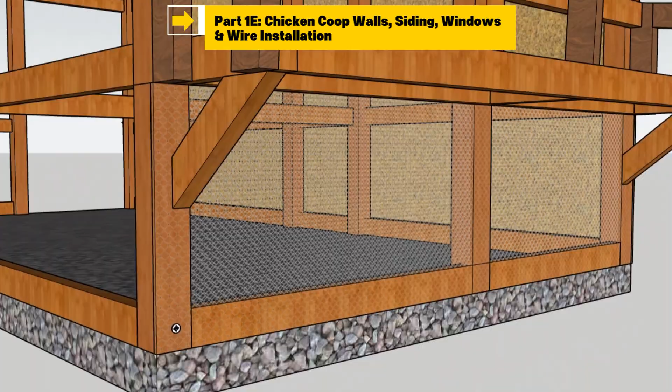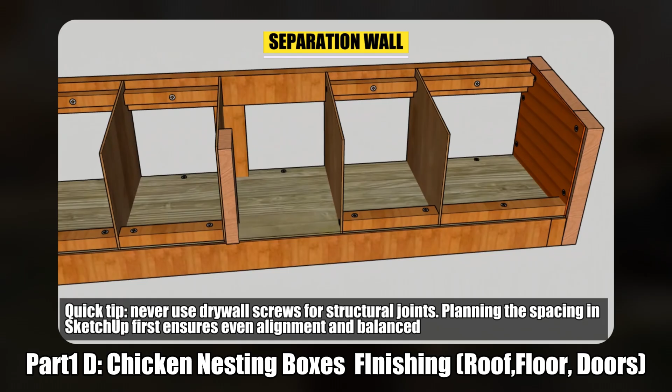Today I'm working on part 1E of my chicken coop design here in SketchUp. Before we start, parts 1A, 1B, 1C, and 1D are already uploaded on my channel. So if you haven't watched them yet, go check them out or click the links in the description below.

In this part, I'll be designing the walls, adding siding, placing the windows, and also modeling the chicken wire for ventilation and protection. And don't forget, I'm giving away my full chicken coop design plan for free.

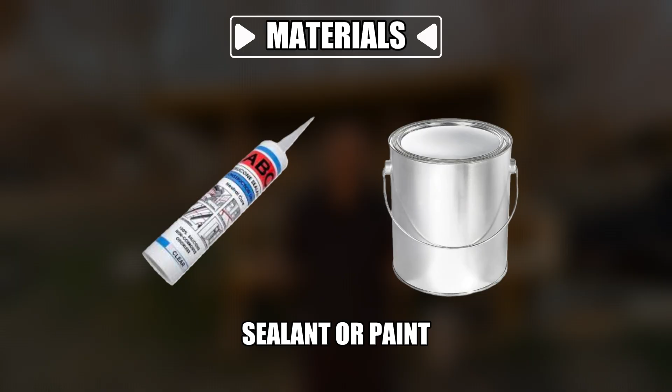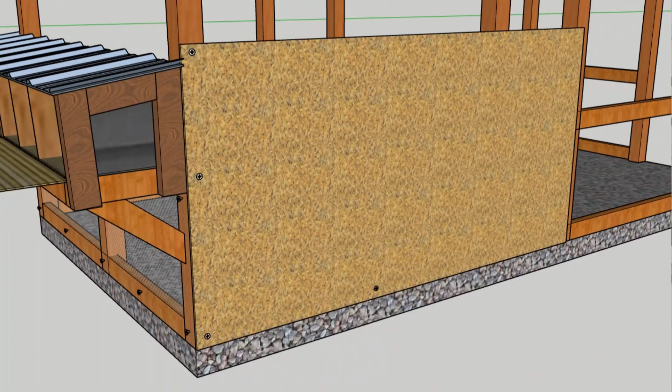Now let's walk through the detailed step-by-step process for the chicken coop walls, siding, and window. Step 1, right side wall panel design. For the right side wall, I will install plywood or wood panels cut into sections to fit the framing. A total of 4 panels will be used to cover the entire wall area. This is based on the standard size of commercially available plywood, which typically comes in 4-foot by 8-foot sheets. Using 4 sheets ensures efficient material use with minimal cutting and waste.

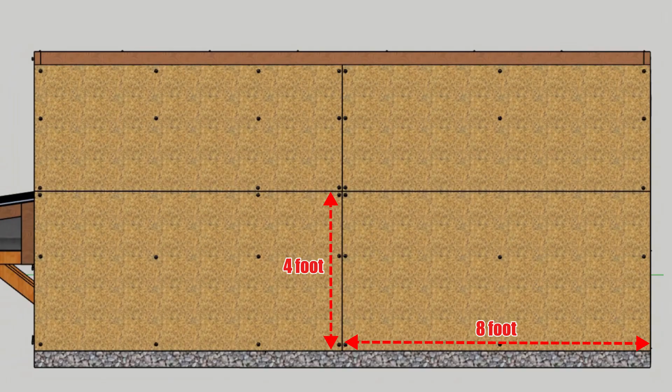The panels will be installed horizontally. The lower portion of the wall will use full 4-foot by 8-foot panels, while the upper portion will be completed using cut sections measuring 3 foot 2 inches by 8 foot, allowing the wall to reach the full height of 7 foot 2 inches across a total width of 16 feet.

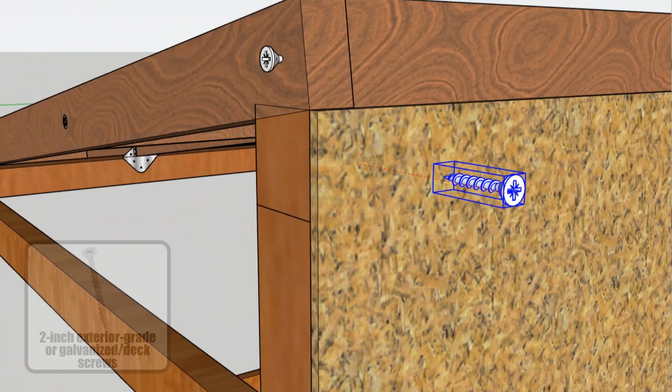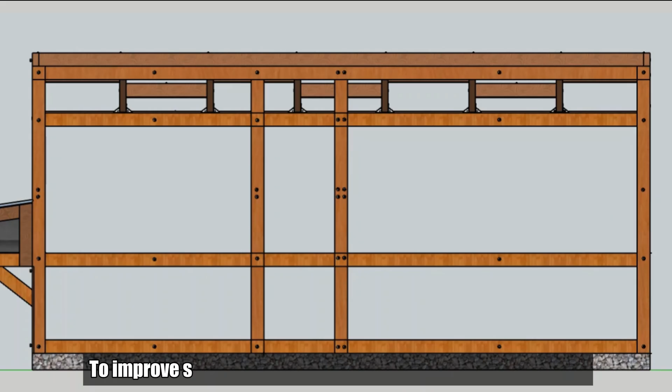To attach the panels to the framing, I will use 2-inch exterior grade or galvanized deck screws to prevent rust and ensure durability in outdoor conditions. Extra attention will be given to the joints and corners between panel sections, where screws will be spaced closer together to improve strength, stability, and overall structural integrity.

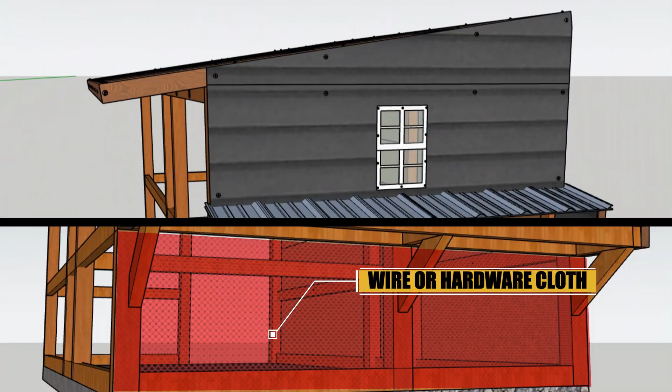Step 2, front wall with window. For the front wall panel, as you can see, the upper section is made of wood, while the lower section uses wire or hardware cloth to allow proper ventilation and airflow inside the coop. The wood panel dimensions are 2 feet 6.5 inches, 8 feet, and 3 feet 8 and 15/16 inches, while the wire or hardware cloth measures 2 feet 2 inches by 8 feet.

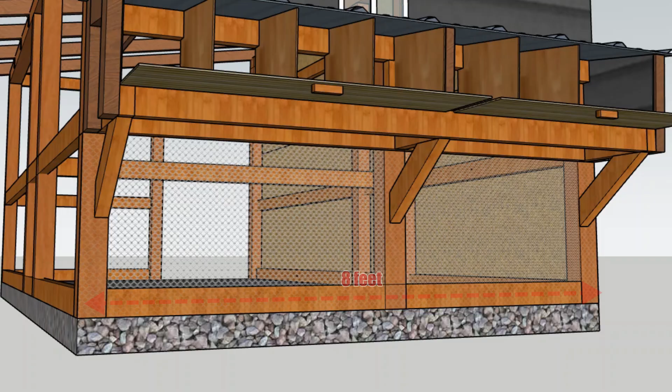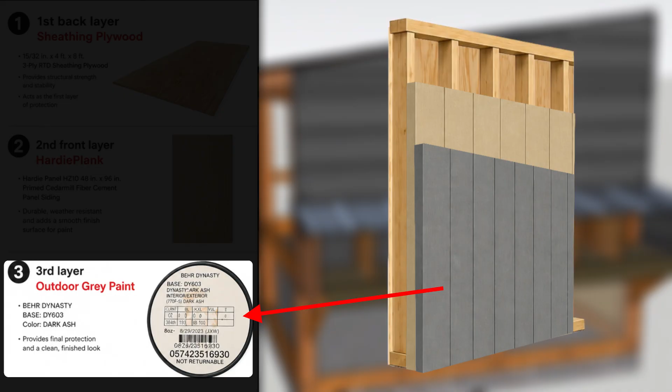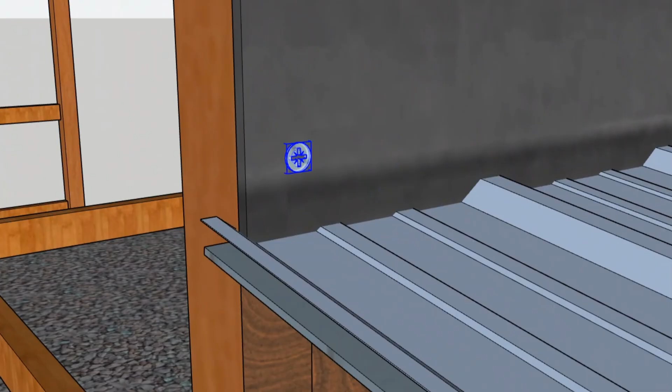This wall assembly consists of multiple layers. Starting from the interior, plywood sheathing is installed. On the exterior, HardiePlank is applied and finished with paint. To attach the wood panel to the frame, I use 2-inch exterior grade or galvanized screws for durability. For the wire or hardware cloth, I secure it to the framing using either staples or screws for a firm, reliable hold.

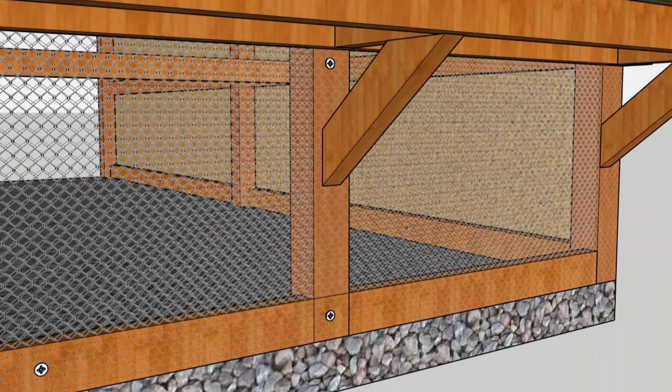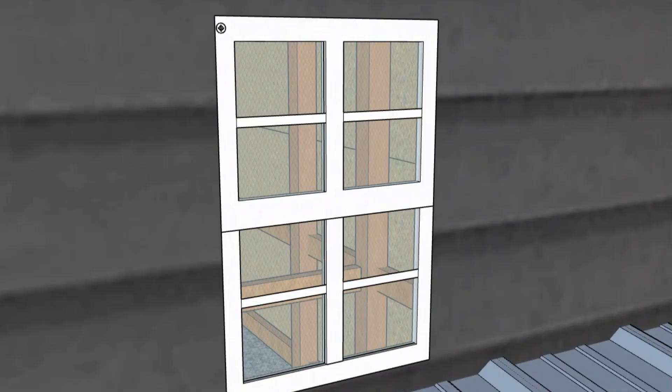This panel also includes a window to provide natural light and additional ventilation. The window dimension is 1 foot and 1.5 by 1 foot 8 inches. To attach the window, I use 2-inch exterior grade or galvanized screws.

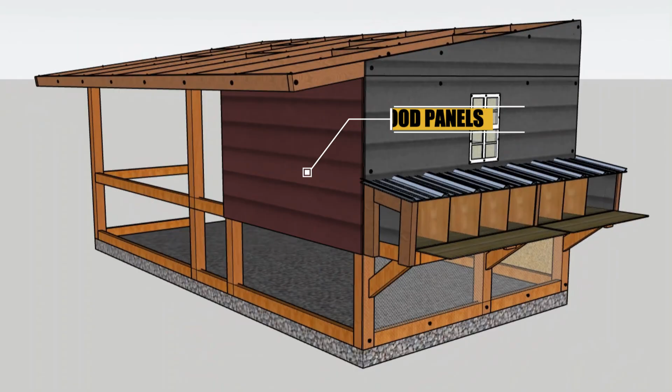Step 3, left side panel. In this SketchUp model, the left side panel is shown with the wood panel installed first to provide partial enclosure and structural support. The wood panel measures 3 feet 10 inches by 6 feet and is attached to the framing using 2-inch exterior grade or galvanized deck screws for durability.

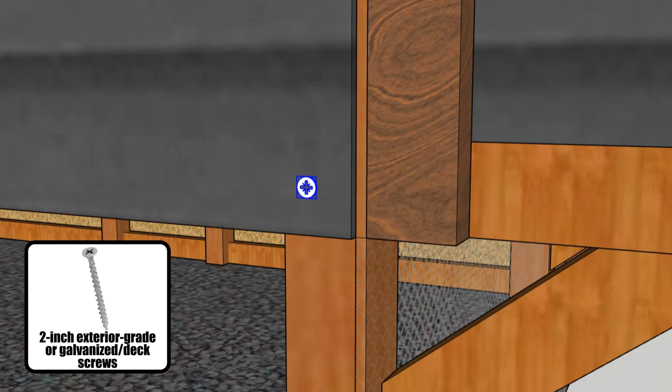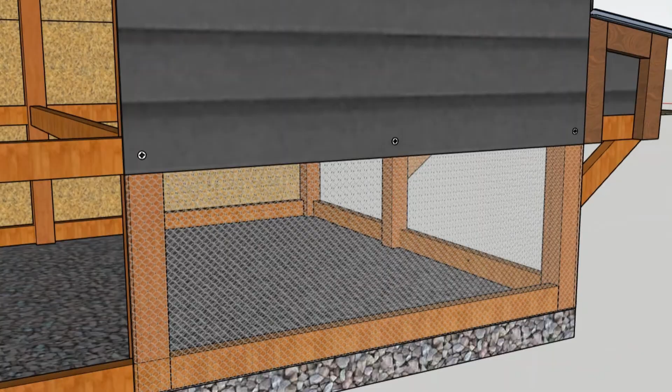For the remaining sections, I install wire or hardware cloth to allow proper airflow and visibility inside the coop. The lower section has a dimension of 2 feet 2 inches by 6 feet, while the upper section is 6 feet by 10 feet, making sure it overlaps the frame for secure installation.

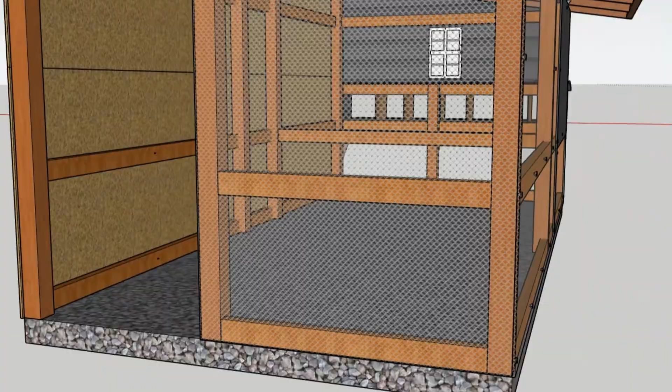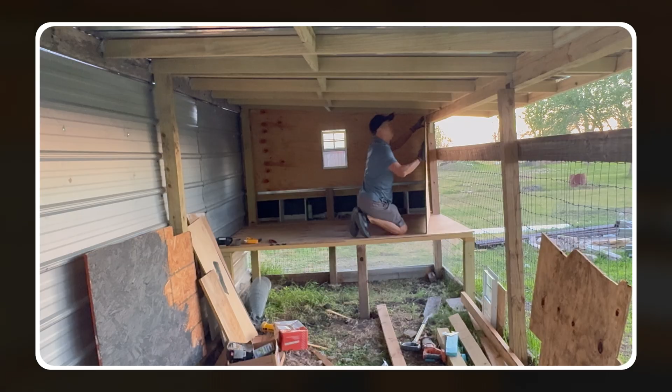However, in the actual build, the process was done differently for a more practical and cost-efficient approach. The hardware cloth was installed first across the framing, and then the wood panel was placed over it in the selected area. All corners and joints are secured properly to ensure everything is strong and well fitted.

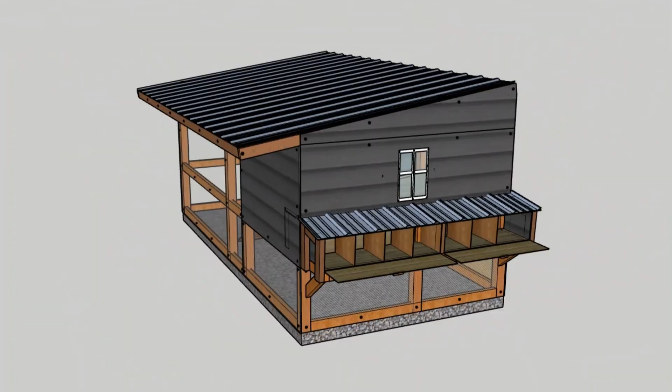This completes the chicken coop walls, siding, windows, and wire installation design in SketchUp. By doing everything in SketchUp first, I can make sure all the measurements, placements, and materials are accurate before moving on to the actual build.

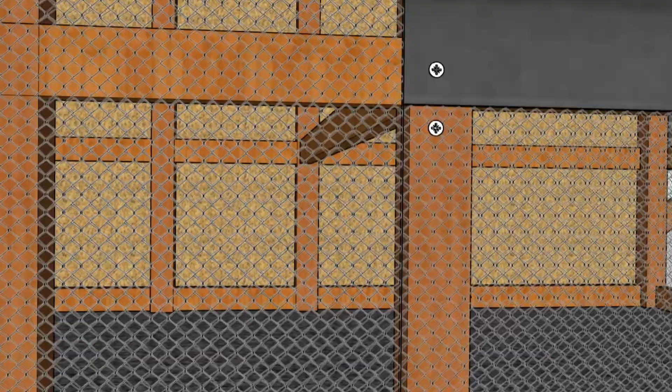This is my first time designing the full wall system with siding, windows, and hardware cloth in SketchUp. So if you notice anything that could be improved, especially at the planning stage, let me know in the comments. I'd really appreciate your feedback.